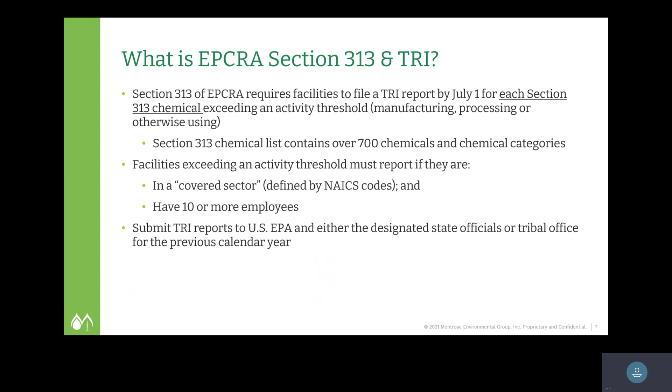And again, 10 or more employees full-time, so that could be done in a combination of part-time and full-time employees. It's basically about 20,000 work hours. The stepwise process can be used to determine if and what would need to be reported for TRI.

Step 1 is determining whether a facility is covered based on whether it is a federal facility, and all federal facilities, regardless of the type of operation or NAICS code that they would fall under, are covered, or if they're in a covered industry sector based on the primary NAICS code. If they're not either one of those 2 categories, then you pretty much can stop there. You're not required to report.

Step 2 is if the facility is large enough based on the number of employees or hours, and that's the equivalent of 10 full-time employees or 20,000 hours, then again, reporting is not required if you don't meet that criteria. Step 3 is to look at the list of TRI chemicals and identify what chemicals might be at the facility. If there are none, then again, reporting is not required.

Then for any listed chemicals found at the facility, look at how they're used. Are they manufactured, processed, or otherwise used? And then the step after that is, of course, to start to calculate how much of those chemicals are used and in what manner.

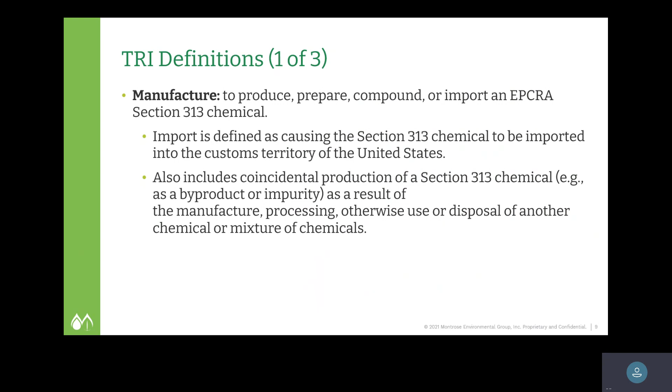Okay, so for a definition of manufacture, that covers the more obvious one, which is intentional production for either sale or use. But it also includes coincidental production. So that's typically as a byproduct or impurity of a chemical that is being used for something else. It also covers importing. And we'll get into this a little bit more on the next slide, yeah, after this.

And then there's process and otherwise use. So to process, it can be an impurity that already exists in a raw material and being distributed into commerce. Processing also includes a preparation of 313 chemicals in the same physical state or chemical form as they are received, or preparation that includes a change in physical state or chemical form. The term also applies to processing of a mixture that contains a Section 313 chemical. Otherwise use is essentially anything that isn't already covered under manufactured or processed.

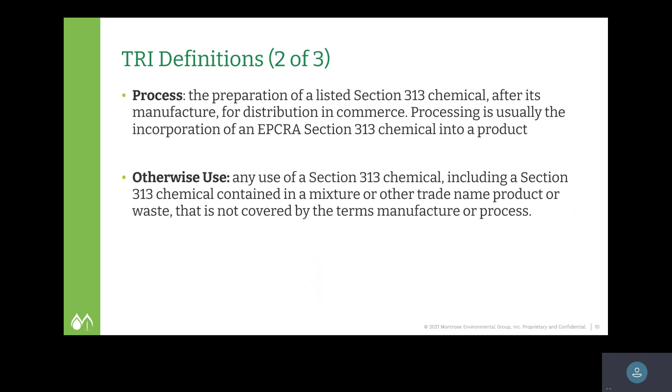So from here, we're going to go into the activities in a little bit more detail, just to give some examples and clarify what all of those words really mean. And so manufacturing includes intentionally producing the TRI chemical because that's what your facility generally does. So if it's manufacturing the material for sale or distribution, or manufacturing it to be used on site in another process.

Chemicals can also be coincidentally manufactured, in which case the chemical is not intentionally manufactured, but it's created as an impurity or byproduct. And coincidental manufacturing can happen at any point in the facility. That can be included in waste treatment or when combusting fuels.

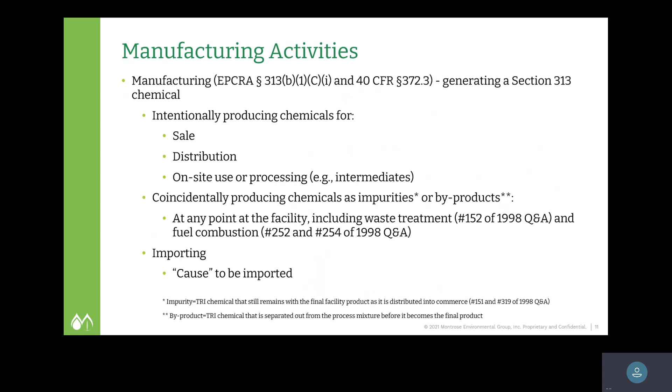Importing of a TRI chemical also includes caused to be imported. What that implies is essentially if you purchase through a chemical broker or through another third party where they are importing it on your behalf, it still triggers reporting for your facility, or I guess is to be considered as part of the threshold determinations.

For processing activities, this is just a little bit more information about examples of processing. Processing involves distributing a TRI chemical into commerce. This can be done either as a reactant in the manufacturing of another substance, or it can be that the chemical is added to a formulation or an article component to a product, which is then distributed into commerce.

Repackaging also is a possible processing activity. Under TRI, processing also includes sending a TRI chemical off-site for recycling. And finally, processing may also include the unintentional processing of a TRI chemical if it appears as an impurity and then leaves the facility in the product.

So let's look a little bit more at repackaging. Any repackaging of a TRI chemical for distribution in commerce is considered processing as well. A repackaging could be from any type of container into any other type of container. So they can be similar sizes, or they could be very different, such as a pipeline into a tank, or vice versa. As long as the TRI chemical is going from one container to the other and is being distributed into commerce, the chemical would be considered processing.

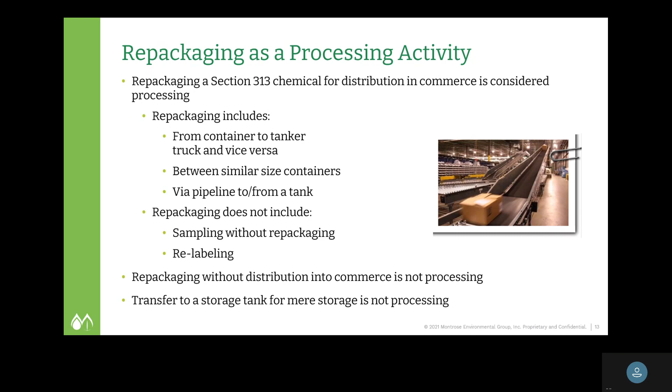The otherwise use also includes pretty much anything that's not considered manufactured or processed. Chemicals that are otherwise used include chemical processing aids like solvents, or manufacturing aids like lubricants, refrigerants, or catalysts, and then ancillary activities. So that might include chemicals used to remediate wastes or to clean process equipment. Chemicals that are contained within tools such as a hydraulic fluid or other equipment at the facility would be considered otherwise used as a manufacturing aid.

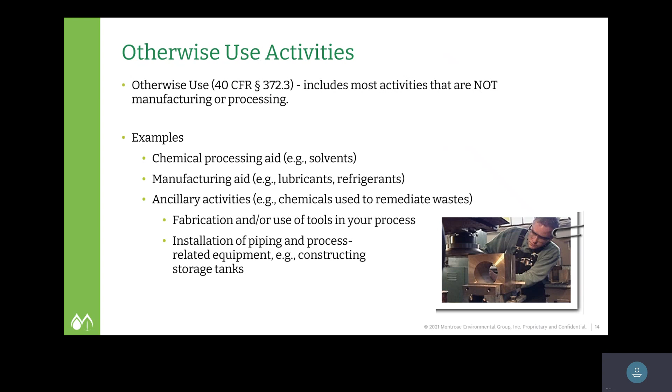Some examples of manufactured, processed, or otherwise used are here. This is a covered facility that has a coal-fired boiler. Say that fast. The combustion of coal generates aerosol forms of hydrochloric acid as a byproduct.

And so it's kind of cheating because the answers are on there. My plan was originally to make them appear later, but

So the question is, of course, are the aerosol forms of HCl required to be reported? Yes, because the facility coincidentally manufactures the hydrochloric acid in aerosol form. If the quantity exceeds 25,000 pounds, then it must be reported. For the second example, it's a facility that combines toluene with other materials to form paint, which is then sold. So in this case, the facility is processing that toluene.

And then in example 3, the facility cleans equipment with toluene and then separates the two components of a mixture by dissolving one component in toluene. So those are two separate processes. So the idea is to consider each one of those operations and figure out if they, in some cases, might have two different activity thresholds. So they might be considered manufactured or processed. In this case, they are both otherwise used because they're cleaning the equipment and also using it for a different activity. In the second part, I forgot to finish reading, sorry, subsequently recovers the toluene, but that is also otherwise used.

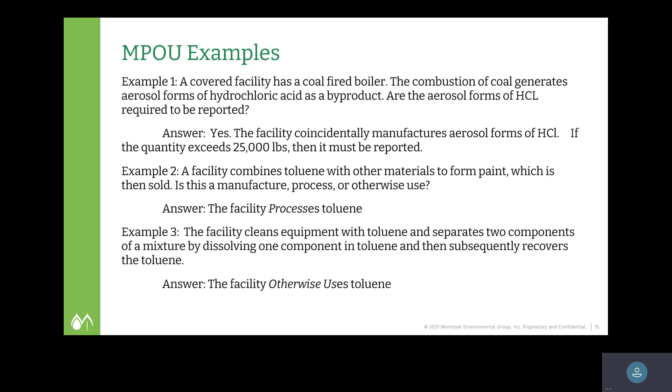So what specific information are facilities required to report? For the Form R, which is the more common form, facilities are required to report on the fate of the TRI chemical. So does it go out as waste? Is it an air or water release? Is it treated or go through energy recovery, recycled, and then off-site transfers as well? So all of those kind of go into that final stage once you've already determined that you must report.

Form A, which I'll cover really quickly, is not very common. Let's consider it the 1040 EZ version for tax filing. Most people don't qualify. If you do, you're really lucky. It's essentially a simplified version. And what that does is it does not require that final step. You don't have to account for your waste management and releases. So really all you have to do is report on the chemical itself.

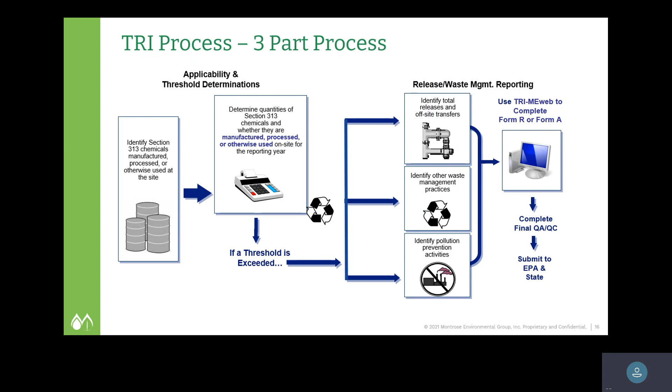This is just essentially the website you would go to if you're trying to file through TRI-MEweb. That is part of the CDX as well. So if you've ever used CDX before, you'd use the same account information.

In Texas, if you report emissions as part of your TRI, you also must match those emissions with the annual waste summary and the emissions inventory report. It also, if you didn't already trigger, would require you to report as far as pollution prevention and have a pollution prevention plan. So that does involve some additional reporting if you haven't already triggered it for one reason or another.

So the non-PBT thresholds, and again, we'll define some of these acronyms that EPA loves, are essentially whether you are meeting the criteria for manufactured, then you must report if you manufactured more than 25,000 pounds. For processed, it's again 25,000 pounds, but if it's otherwise used, then it's 10,000 pounds for that chemical. And so as I mentioned before, if a chemical is both manufactured and otherwise used, you would evaluate it against the activity threshold that applies for that activity.

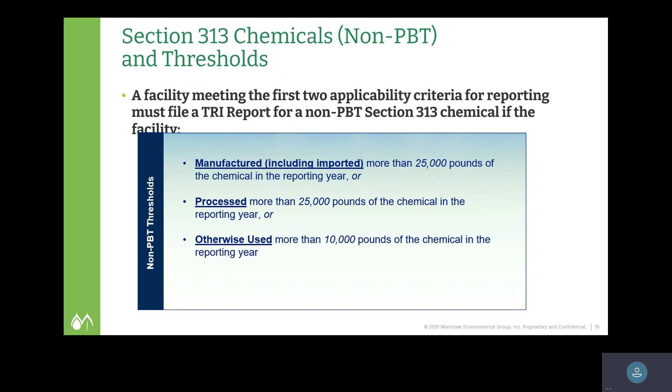So the listed PBT, this is where we go a little bit more into the detail. So PBT is a persistent bioaccumulative toxic chemical. I can't say that all at once, so PBT is much easier. And there are a subset of chemicals on the list. PBT chemicals have lower activity thresholds because they're of special concern, and they have some special rules when reporting. There are 16 chemicals and 5 chemical categories that are defined as PBTs in TRI.

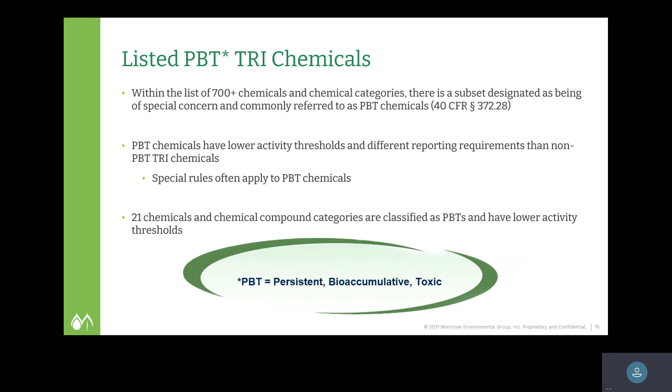So this is an example. This does not cover all 21, but here's kind of a grouping of each and the different thresholds that would apply. You've got 100 pounds, 10 pounds, and 0.1 grams per year for dioxin-like compounds. Essentially, there are some caveats in here, but once you get past the qualifiers, if you determine that you are either manufacturing, processing, or otherwise using these materials, then you'd have to evaluate them against these lower thresholds.

PFAS, which was added back in 2020, also is subject to the 100-pound per year threshold, though not listed as a PBT.

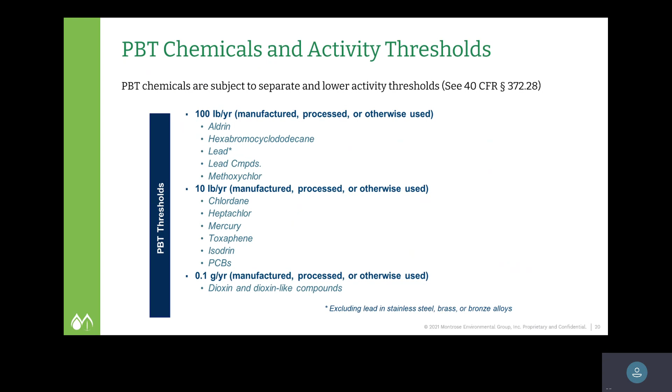So the list contains over 700 chemicals and chemical categories. They are listed essentially in 4 sections: the chemicals by name, chemicals organized by CAS number, qualifiers, which we'll get into in a little bit, and then some chemical categories. The list does change fairly frequently. Almost every year, there's either an addition or some clarification issued by EPA. So it is something that you must go through every year to make sure that you're evaluating the right threshold and the right category for whatever materials you're using. And of course, here's the website again that you can continue looking more into.

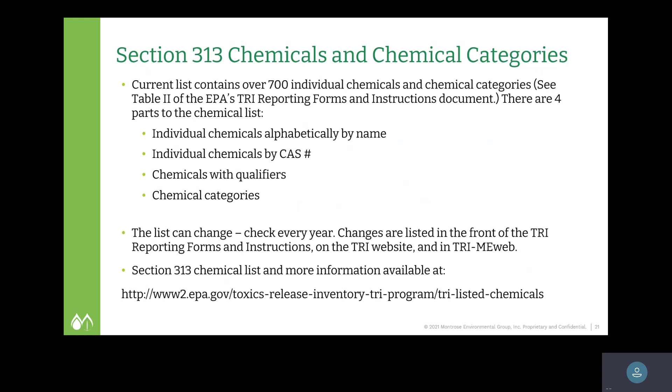So some of the qualifiers that we have, they're parenthetic qualifiers when you see them on the list. And it can be anything from how they are manufactured or processed. For example, for aluminum, the qualifier is fume or dust. This means that aluminum would only be considered under TRI in the fume or dust form. Isopropyl alcohol is also a very special example. It only needs to be considered if the facility is manufacturing isopropyl alcohol and using a process called the strong acid process. Otherwise, it would not qualify.

And then lastly, sulfuric acid as another example, which is covered only in the acid aerosol form. So this typically happens when you have either a process tank, a bath, or a stripper or scrubber, where you would actually send it up into the air and somehow create a mist. So that's the most common way of having that kind of qualifier show up.

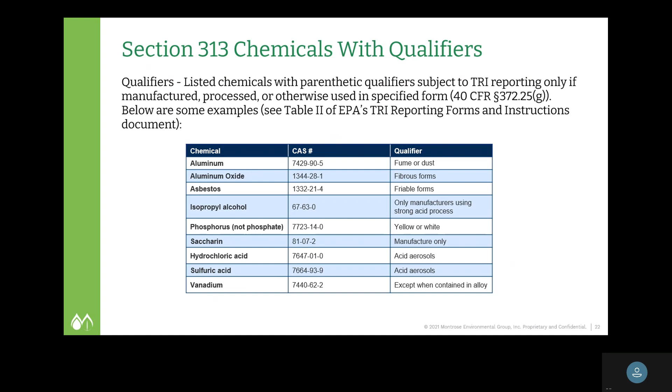Facilities also need to take care to identify chemicals used or generated at the facility that may fall into a category group. Chemical category groups have individual chemicals which must be considered whether there are multiple. So in this case, you're going to have the metal and different metal compounds that could be considered under the same category.

There are some caveats to that, not to get too complicated, but if you have a metal and metal compounds that both exceed the threshold, then you only have to report it under one as the metal primary, unless there are some other caveats, which there are many. But essentially what you have to do is consider how many of those compounds would exceed and then look at them together as one category.

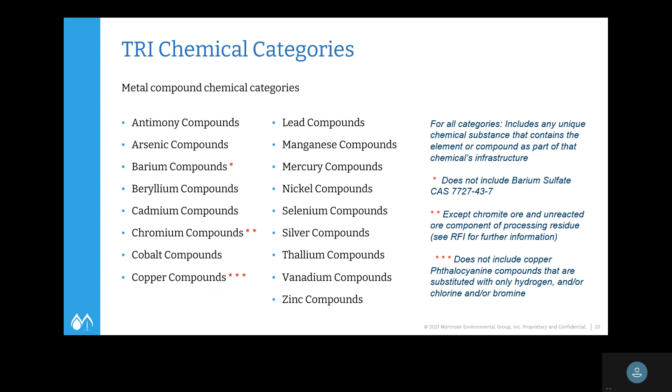Remediation of on-site contamination would not be considered a threshold activity as long as the waste was on-site and not brought in from off-site for the purposes of waste treatment or waste management.

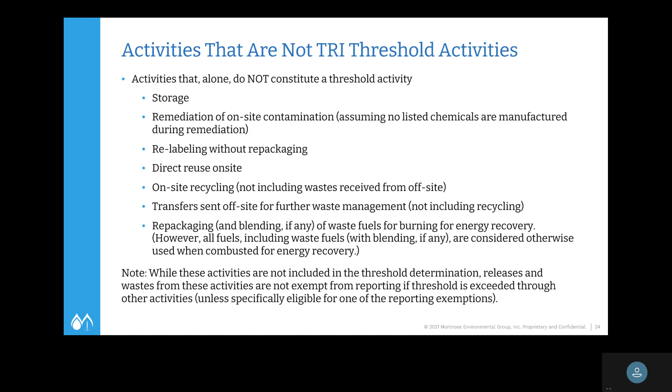So there are several others on here. I'm not going to read to you guys all of the bullets. You guys can get a copy of the presentation. I really don't want to bore everybody to sleep. Skip that.

Okay, some exemptions. TRI exemptions include the de minimis exemption, the articles exemption, and the laboratory activities exemption. A number of exemptions apply only to facilities in the metal and coal mining sectors. And then there's also a series of exemptions for motor vehicle maintenance, routine janitorial, facility grounds, intake water, air. So there's several others that are basically not part of the primary activity or production activity for the facility.

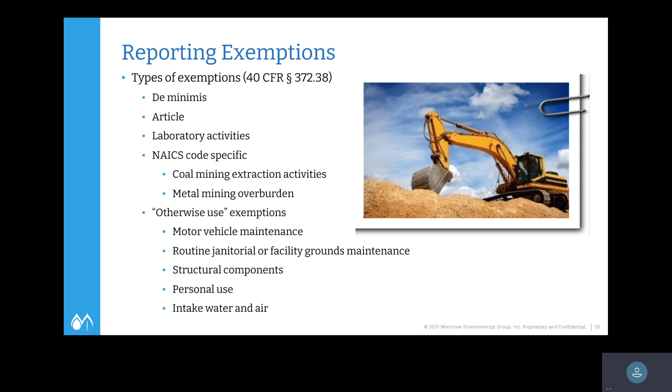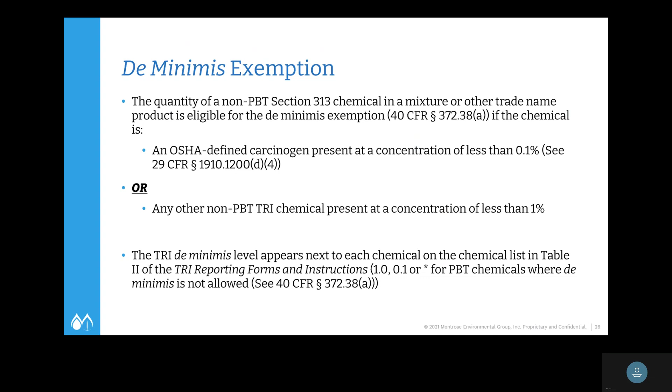Let's look at the de minimis exemption first. Under the de minimis exemption, the quantity of a non-PBT chemical in a mixture is exempt if, in the case of an OSHA-defined carcinogen, it is present at a concentration less than 0.1%. So if it's considered a carcinogen, then the 0.1% applies. Otherwise, it's 1%. If it's less than 1% for a non-PBT, non-carcinogen, then it would be below the de minimis and would not need to be considered.

The de minimis exemption cannot be used for PBT chemicals. As far as the supplier notification requirements, suppliers are not required to notify users of the presence of a TRI chemical that is below the de minimis concentration. However, the users of the mixtures containing the chemicals are still required to consider all quantities known to be present. So this exemption is the only exemption that does not apply to PBT chemicals. All of the others do.

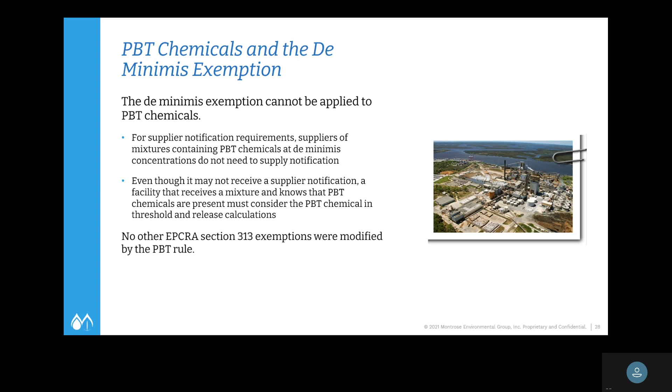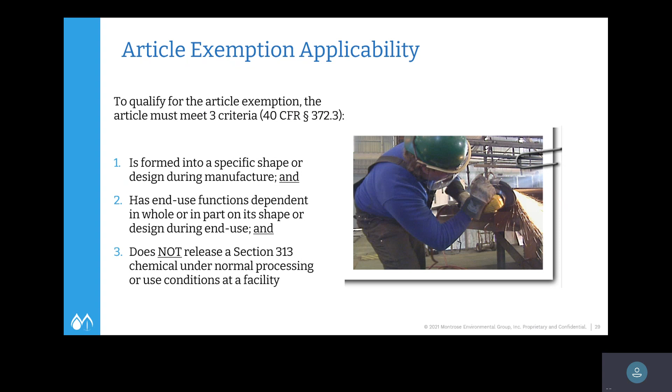The article exemption applies to TRI chemicals contained in articles. There are 3 criteria that must be met to be considered an article. First, an article is formed into a specific shape or design during its manufacture. Second, an article has an end-use function that is dependent in part or wholly on that shape or design. And third, an article does not release a TRI chemical under normal processing or use.

If a TRI chemical is released from an article during its normal use, it very well may negate the exemption. In order to maintain the article status, the total chemical release from all articles or like items must either be in a form having a specific shape or design, or recycled directly or directly reused. And emissions, or releases, must be less than or equal to 0.5 pound.

The form having a specific shape or design generally means that the releases from the article must still look like and be recognized as the article. If more than 0.5 pound of the chemical is released in the course of a year, then of course the exemption won't apply.

So here's a few examples of how this works. Wire itself could be considered an article, but in cutting the wire to specific lengths, there's some waste of off-spec cuts and some dust. The generation of the cuts are still recognizable as pieces of wire and will not by themselves negate the status. Quantities of the dust and off-spec cuts that are not recognizable, that are greater than 0.5 pound and not recycled, would negate the status. So obviously, if you've got more than the unrecognizable amount, that's more than 0.5 pound.

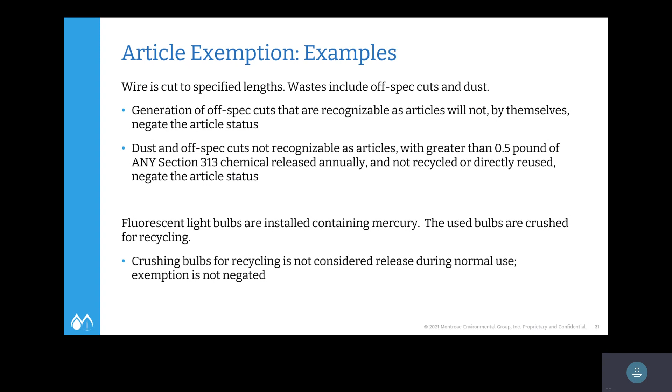Let's look at the example of fluorescent light bulbs. When the bulbs are no longer of use, they are crushed in an enclosed container for recycling. In this case, the fluorescent bulbs would still be exempt. The normal use of fluorescent bulbs does not release mercury. Crushing of the bulbs may release mercury, but that is not considered normal use of the bulb. So the exemption is not negated. Note that the mercury in the bulbs is exempt from TRI reporting, but other regulatory requirements associated with proper management of waste should of course be followed.

So it's obviously really easy to get all of those rules and exemptions confused. It only takes that 0.5 pound of chemical release to negate the exemption. You do need to make sure that you've adequately done your due diligence and quantified that as best as possible, to make sure that you don't negate the article exemption.

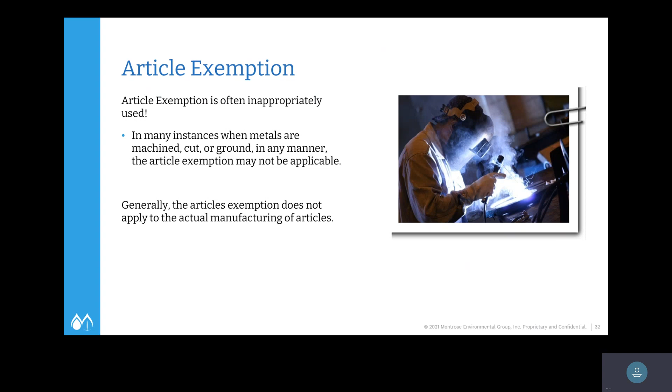There's a number of different sources of information available to the facility to be able to identify the chemical concentrations and collect the data. We've talked about some of these already, such as SDSs and product specifications. Facilities should also consider any waste profiles and testing. Consider any waste leaving and raw materials entering the facility.

Essentially, what you need to do is really a process flow diagram that shows all of your input streams and all of your waste streams for each chemical, and all of the different manners in which you're utilizing it. That will help you determine what activity thresholds will apply. Regulatory reports, either air permits, water, chemical analyses associated with those permits and applications, and waste reports are all good sources of information for your TRI chemicals.

Concentration of a TRI chemical can often be obtained from the SDSs or other products' technical documents. In some cases, the exact concentration is provided. If that's the case, then you'd have a concentration of, for example, 25% that you'd be able to utilize directly for the activity threshold determination. In other cases, the SDS may provide only an upper bound. If the SDS says that there's at most 25% of a given chemical, then you would actually use 25% as the upper limit in the calculations.

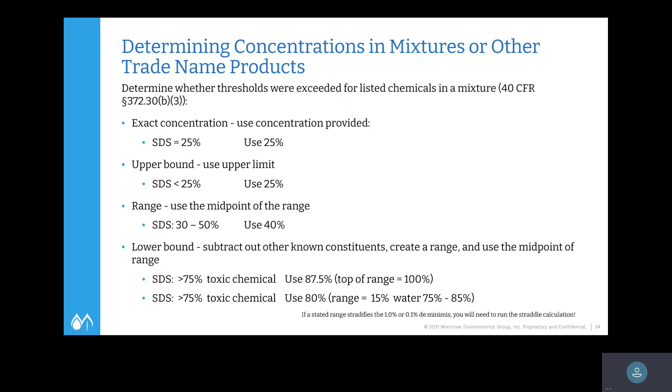So we've got a couple of examples here. The facility otherwise uses 15,000 pounds of an industrial solvent for cleaning. The SDS provides that it contains at least 50% of tetrachloroethylene, and then also provides 20% non-hazardous surfactants. This is the only tetrachloroethylene mixture at the facility, so we're only going to take this one into account when we're doing math.

You subtract out that non-hazardous amount, leaving a maximum of 80%. So you determine the midpoint between the known minimum, which is 50%, and the reasonably expected maximum, which is 80%. So that midpoint becomes 65%. You multiply the weight of the solvent to get the number of pounds of that material itself, in this case, 9,750. Because the total amount is otherwise used and the threshold for that is 10,000 pounds, the facility is not required to submit a report for this chemical.

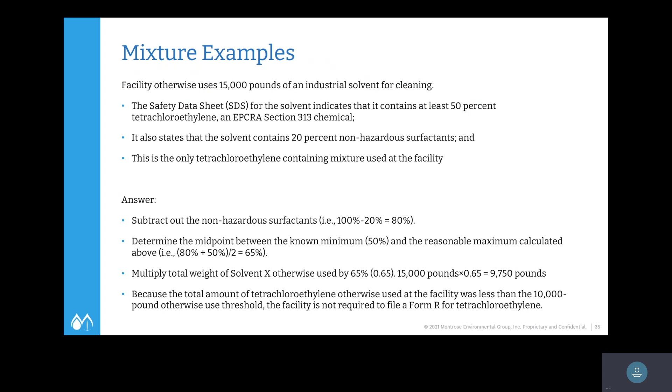When estimating releases and waste management quantities, be sure to consider all sources and uses of the TRI chemical, not just your main feedstocks. For example, consider chemicals that are used to clean production equipment, fuels, maintenance chemicals, catalysts, and lubricants for machinery. These could all be sources of TRI chemicals.

Reasonable estimates are required by law. However, the best approach is usually facility specific. The data and approach must be documented and should be consistent. And in this case, even when you determine that you don't need to report, you really need to maintain that documentation in the event of an audit. That's going to be important to show that you documented all of your assumptions and all of your supplier information.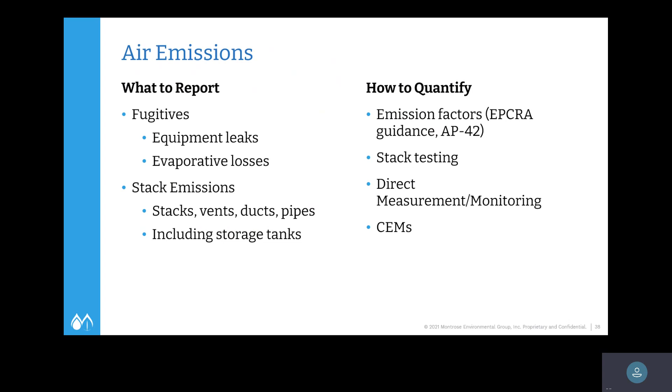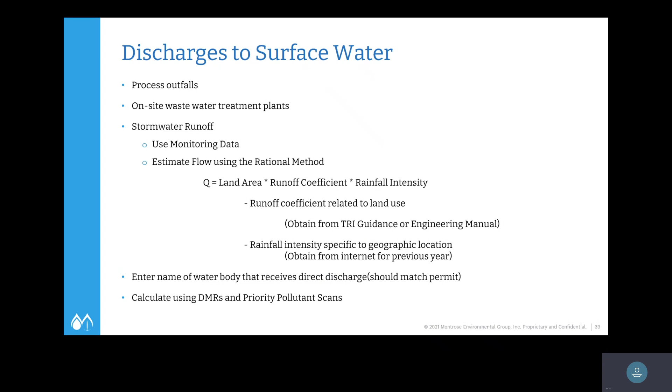Similarly, for discharges to water, you can look at stormwater, look at your actual process streams, what's going to on-site treatment, and anything that's going off-site to a water body or streams, any DMR or other analysis that you might have that would give you constituent information and quantities.

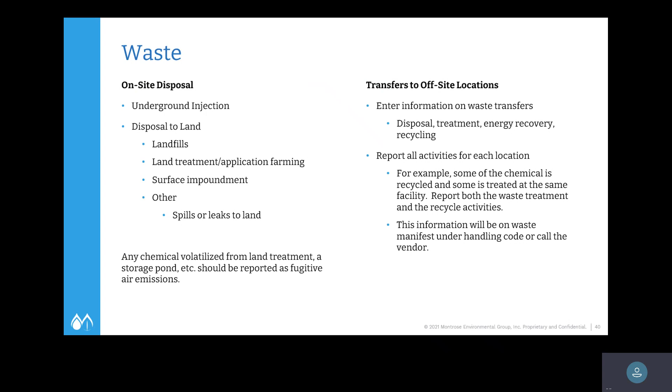For waste, what do you have for on-site disposal? What do you send off-site? What's recycled? Any recycled information that you might have in terms of content, what's coming back on site. Then you have obviously what's going out and anything that's being reused. So you must account for both when it's coming on site as a recycled material and when it's leaving off site. You should have that documentation, the analyses.

So let's look a little closer at the actual Form R. It's comprised of two main parts. The first part is the facility specific information. It has 5 sections for reporting information about your facility, covers specifically your facility, your location, parent company, and several other details in terms of identification for your facility.

The second part covers information about the chemical which you're reporting, and those are covered in 8 sections. The first 4 identify the chemical, how it's used, and the maximum on site at any time. The next 4 are what we call the meat of the reporting, and that is where the facilities report the actual quantities that were managed as waste and how they were distributed.

When using the TRI-MEweb application to complete the Form R, the sections of the Form R are not covered sequentially. So this allows the system to streamline some of the questions, but we'll now go through some of the information that goes into TRI-MEweb.

It's important for TRI filers to understand the difference between reporting a 0 and reporting an NA for not applicable. Use NA when there is no possibility that the chemical could be released or otherwise managed as waste. For example, in Section 5, facilities enter the quantity of the TRI chemical that went to their on-site landfill. If the facility does not have an on-site landfill, there's no way that the chemical could end up there, so you use NA.

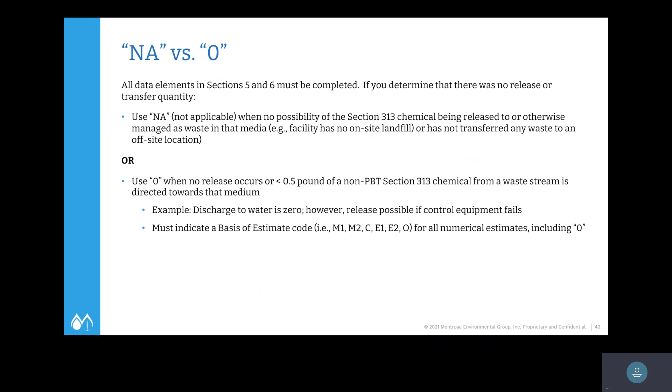So some of the trickier items that you get into with Form R are the metal versus metal compounds. There are specific circumstances under which you report the individual metal compounds versus the elemental metal. The way you consider the threshold determination, whether you could do it as a combined category grouping, and also what the fate is, of course, and how that's all reported goes into much more detail in the instructions. So if those categories apply to you, that's where we'd recommend you look at it from a facility-specific operation.

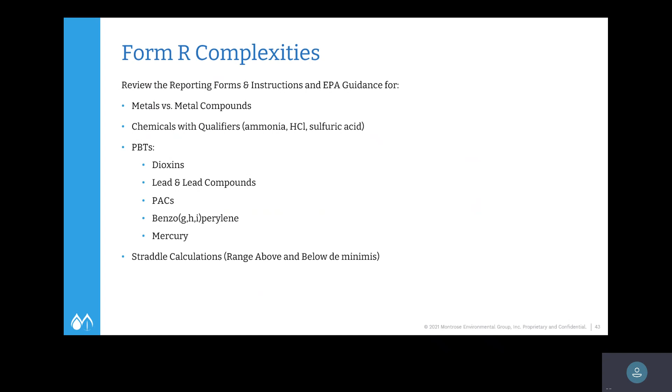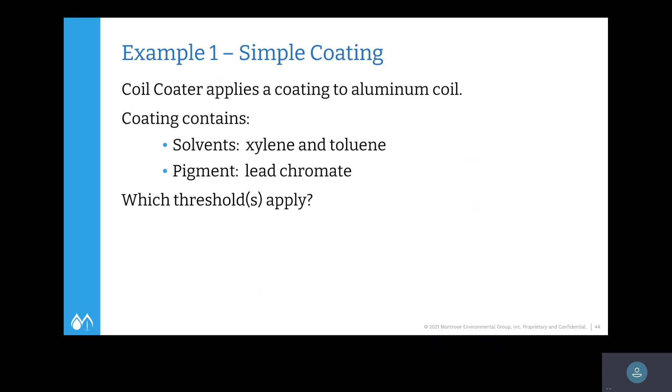A couple of really quick examples. We've got a coil coater that applies a coating to an aluminum coil. In this case, the coating contains two solvents, xylene and toluene, and a pigment. In this case, which thresholds apply for each of those materials?

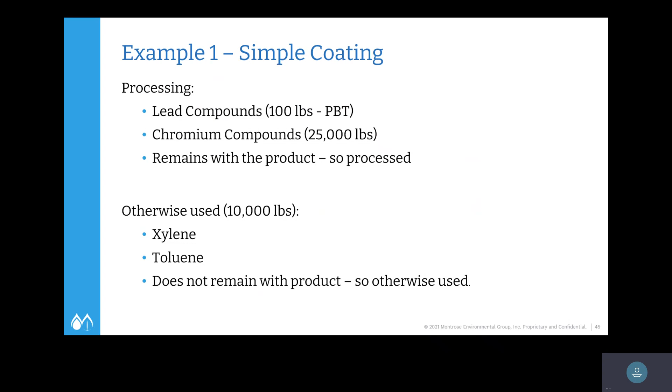So in this case, it's processing for the lead compounds, and lead is a PBT, so of course the 100-pound threshold applies. The chromium compounds, at the processing threshold. And that's because these materials remain with the product, so they are processed. Otherwise used are the xylene and the toluene, which are the solvents, and those do not remain with the product. And so that is the reason why they're considered otherwise used.

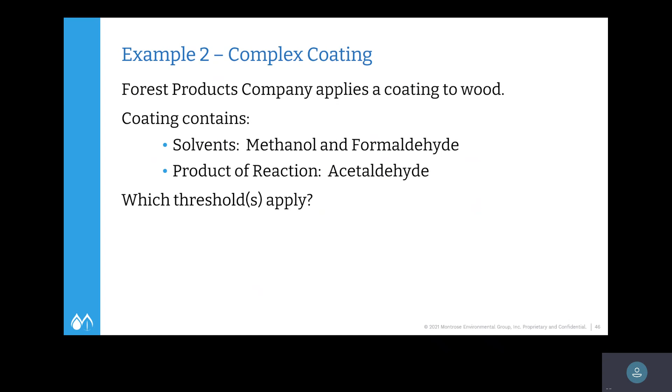A forest products company applies a coating to wood. The solvent is again methanol and formaldehyde. Product of reaction is acetaldehyde. So which thresholds apply? It's produced in the reaction, so therefore it's manufactured. And then for the others, again, as solvent, they will not remain with the product. So methanol and formaldehyde are considered otherwise used and subject to the 10,000 pound threshold.

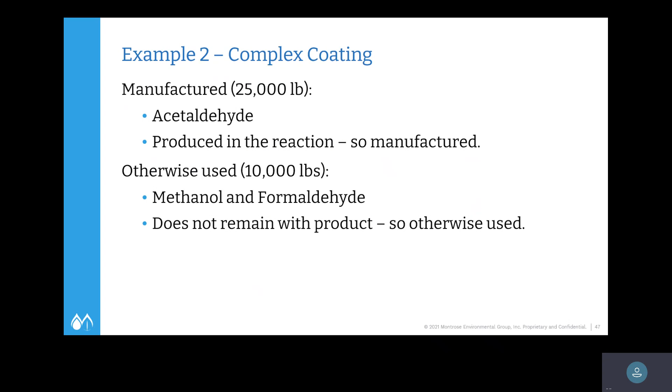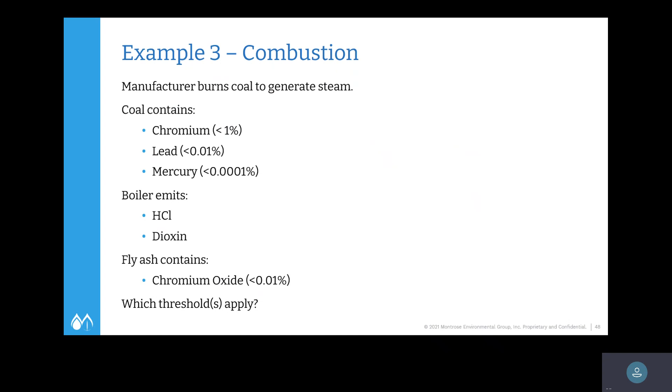And then lastly, a manufacturer burns coal to generate steam. The coal contains impurities, chromium, lead, mercury. And then as a product of combustion, you get the HCl and the dioxins. The fly ash contains chromium oxide. So you need to consider all of those in terms of the threshold determinations and of course their final fates when reporting. So otherwise used are the impurities, the contaminants in any fuels.

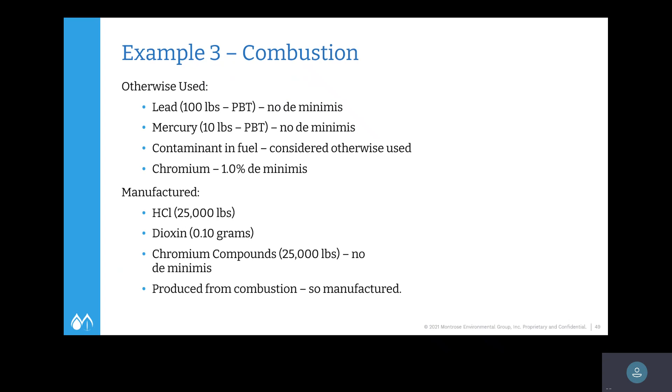Again, manufactured byproducts, HCl, dioxin, and chromium compounds. And so since those are produced from combustion, those are manufactured. That is pretty much the bulk of it.

Here's just some quick catch-ups. There's been a lot of movement in the last couple of years. PFAS was added for reporting year 2020, subject to manufacturing, processing, otherwise used reporting thresholds of 100 pounds, which is really low compared to most others, even though it was not listed as a PBT. Three others were added for reporting year 2021.

And then in November of 2021, EPA added all natural gas processing plants as a covered sector. So the NAICS code was added to the list of codes. 2022 will be the first year. The report will be due July 1 of 2023.

And then in December of 2021, EPA extended TRI reporting requirements for ethylene oxide facilities. Originally, they had issued a notice to all 31 facilities and said that it was a possibility. They cited concerns about harmful effects to human health and employee exposure and added 29. And in this case, EPA has the discretionary authority to extend TRI applicability based on a variety of criteria outside of just the listed NAICS codes. It can be anything based on chemical toxicity, proximity of a facility to other facilities with similar emissions profiles or releases, and of course, proximity to heavy population centers.

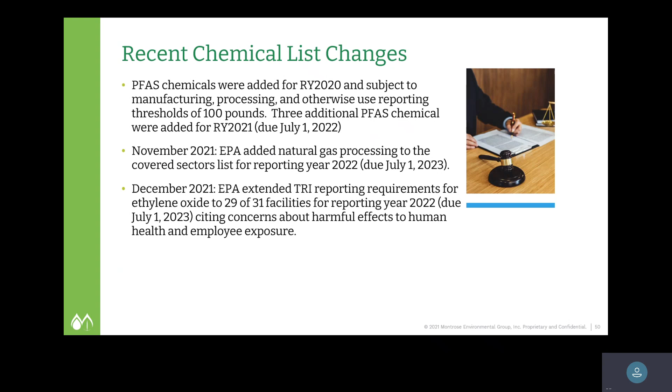So in this case, they determined that they were concerned with the harmful effects, the toxicity of ethylene oxide, and pulled in specifically the 29 facilities. So for newly subject facilities, you should already be actively gathering operating data to track the chemical activities, the releases, and the waste management quantities, monthly preferably, so that at the end of the year, it's a little easier to compile all of this information.